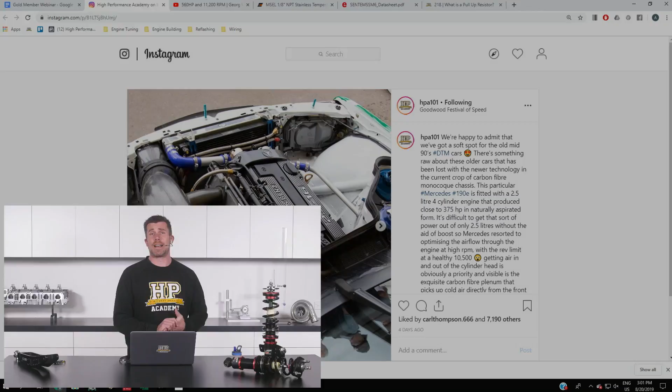So this is a Mercedes 190E DTM race car. This is from back in the early 90s, and I think this is probably a slightly more pure era for race cars in general. We saw the DTM cars. Also, the mid-90s, probably one of my favorite eras for British touring cars, super tourers, etc. Just a lot of really cool race cars were built over that period. Why I like this period is that they were a little bit rawer than what we see now. Not so many driver aids, a bit more driver skill perhaps required. Anyway, that's not really the purpose of the discussion.

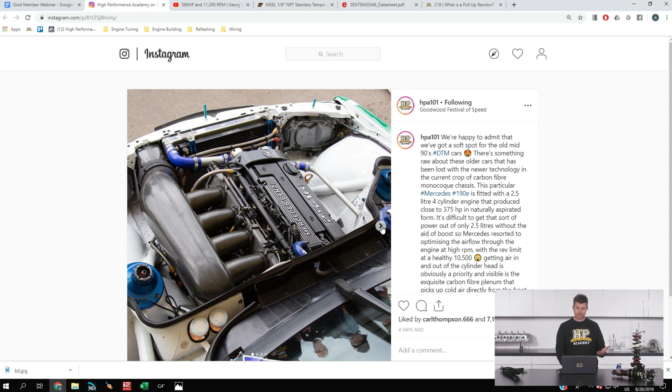What I found interesting was they had a 2.5 litre base engine, and I think at the end of their development they ended up around 375 horsepower. Depending who you talk to, those numbers vary from about 350 to 375. I like to be a little bit generous, so we went with the larger number. It's obviously difficult without a turbo to make those numbers from a four-cylinder engine with just 2.5 litres, and there's a couple of things they did to help. First of all, you can see in this shot that I've drawn all over poorly, instead of individual throttle bodies or a single plenum and throttle, they used a slide throttle arrangement. Now, nothing particularly unusual about that.

There's a variety of techniques for throttling the airflow into the engine. Our conventional throttle body that we see in most factory road cars and race applications is fine, it works well, but even at wide open throttle there is still something stuck in the airflow that can disrupt and reduce the airflow. So the slide throttle body, when completely open, offers absolutely no restriction to airflow. There are a few questions about whether the slide throttle impacts the airflow, causing turbulence, at part throttle, and I don't have any data on that. I could imagine that may be an issue, but these engines are focusing more on outright top-end performance at wide open throttle than drivability.

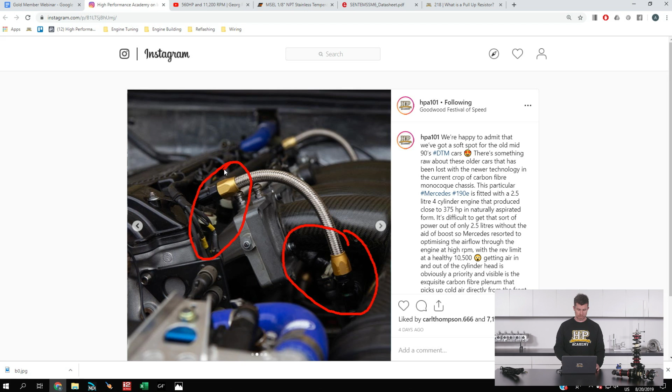Another thing we can see on this shot, it is a little tricky, but if we follow the fuel lines, there are two sets of injectors fitted. We've got a primary set on the left-hand side, right up by the intake port at the head flange, a pretty conventional location for port fuel injectors. And then we've got a secondary set that go into the carbon inlet runners, pre the slide throttle bodies. This isn't done because they couldn't support the fuel requirements with a single set of injectors. Our fuel injector selection has grown dramatically over the last few decades, but we could still get injectors big enough back in this era for 350 plus horsepower.

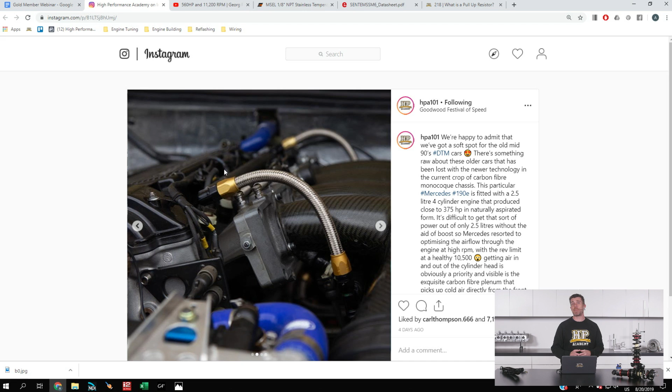However, what they were doing was actually using staged injection here, and the idea is to stage in those secondaries pre-throttle body at wide open throttle and higher RPM, and the aim was to try and get a more homogeneous fuel air mixture, basically trying to get every last scrap of power out of the available air that was entering the cylinders.

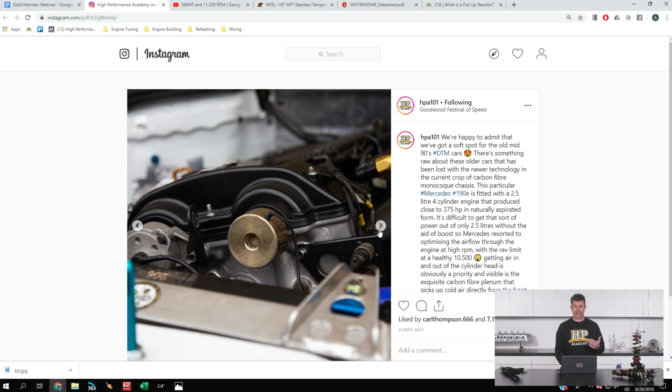And probably my favorite part that came out of this interview or this tech tour was the fact that the engineers actually fitted or retrofitted variable cam control to these engines. So in particular here you can see the little cylinder on the front of the intake cam there. So this wasn't a continuously variable cam control system like we see now. This was a switched cam control system, still popular on a range of different engines. Particular one that jumps to mind is Nissan used it on the SR20 as well as the RB series of engines.

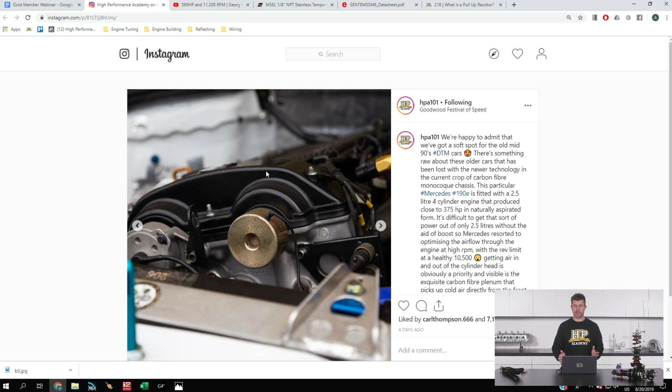So it allows the cam to be advanced at low RPM to help low RPM performance, and then retarded again at a certain point in the rev range in order to optimize high RPM performance. And that was important as well because these engines did rev through to 10,500 RPM. So trying to get as wide a torque curve as possible was pretty important. So there's a little bit of insight into that car. I probably should actually show you a picture of what the car looked like.

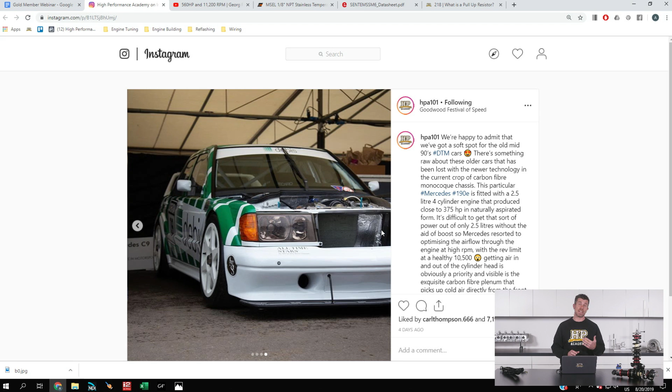Interesting point that came out of talking to the Mercedes engineers there. They actually had just come recently from a Mercedes historic event in which Lewis Hamilton was attending, and Lewis actually got to cut some laps in this 190E. Obviously a little slower and a little less powerful than what Lewis Hamilton's normally used to. Apparently after about 3 or 4 laps they were struggling to get him out of the car, and he was grinning from ear to ear. So just to show you that you don't need all the power in the world, and you don't need to be driving an F1 car to have a lot of fun out on a racetrack.

Right, now we have been talking a little bit recently about our black Toyota 86, the one we've got our 450 horsepower V8 in it, and we've been battling with this car with a few issues around cooling in particular. So we have made some changes, and for those who have been watching us religiously for a fair while, you probably remember a few months ago I talked about the fact that we made some changes to the cooling system in terms of originally there was a large oil cooler fitted directly in front of the radiator. We also had an over the radiator cold air intake designed for a Holden Commodore that was fitted. This came down over the top of the radiator, again blocking some of the flow.

So we made some changes there, moved the oil cooler so it wasn't in front of the radiator, put a conventional air filter on it, so freed everything up there, and we were hoping that this was going to keep our engine cool. In the one race that we did prior to making these changes, we were really battling and having to short shift the engine because after about 5 laps it was getting up to about 110 degrees C, and obviously at that sort of temperature not really going to help with the life expectancy of the engine.

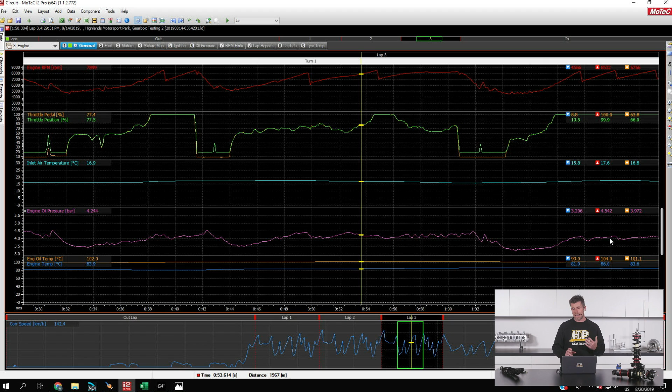But when we're only looking at a snapshot of data like this, it's hard to get a really good idea of what is going on and what may go on if we continue to go and put in another 10 laps after this. So if we just zoom back out, we're having a look at a wider section of the data here. In fact, we've got all of our data here from when the car went out on the track to the point where I got out of the throttle because I was coming back in for a cool down lap.

So if we look at the left hand side at the start of the data here, just after we get out on track, we can see our oil temperature sitting at 69 degrees, our coolant temperature 82. And what we can see with our coolant temperature is essentially it cycles up and down a little bit. We've got a maximum of 89, a minimum of 81, but the important thing is we've got this gentle oscillation depending on whether the car is under sustained wide open throttle operation or whether it's going through a corner at lower RPM or braking. So that's good. This is what we want to see. We've got this gentle oscillation and we're never really seeing a continual trend with our temperature climbing.

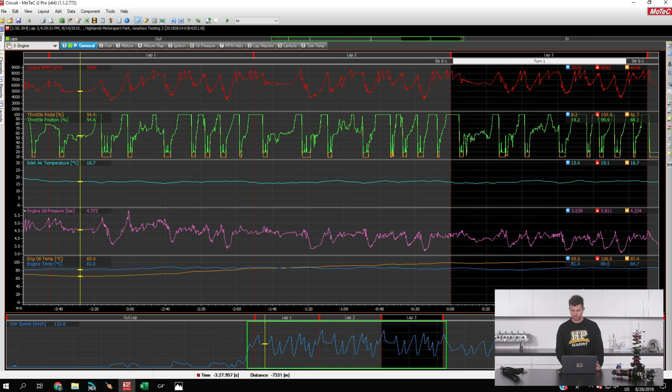Unfortunately, the same can't be said for our oil temperature here. When we initially get out on the track, we see the oil temperature drop a little down to 65 degrees C as we start getting airflow over the cooler. However, from this point on, it's a constant rise. And basically at the point where we get out of the throttle on our cool down lap, we're up to 105 degrees. So it doesn't take a rocket scientist to extrapolate that trend that we've got going on there, and we've got this constant movement of our oil temperature up and to the right.

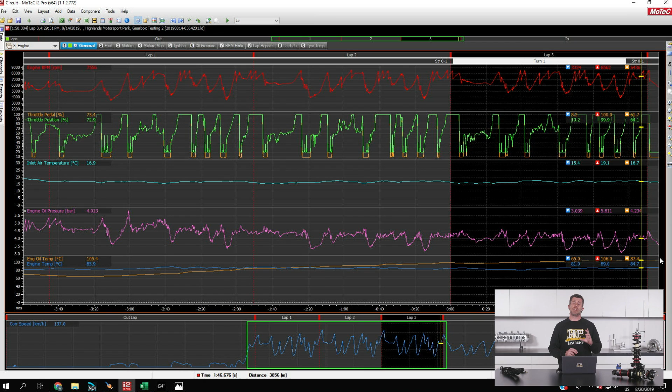So what this indicates to us is probably we're going to have issues for endurance racing and we are going to be fitting a larger oil cooler. It's not all bad though. Getting control of our engine coolant temperature is a massive win, so we're pretty happy with that.

Now at the same time, if we head across to have a look at some of our other data here. If we go to our transmission general, we've got our temperature for our gearbox, that's in the center here in purple, and we've got our temperature for our differential in green at the bottom. Now this is definitely not good news. We can see we've got that really sharp increase at the start of the session. Transmission temperature 79, diff temperature 79 basically, and by the end of that session here we have peaked 105 in the gearbox, 123 in the diff.

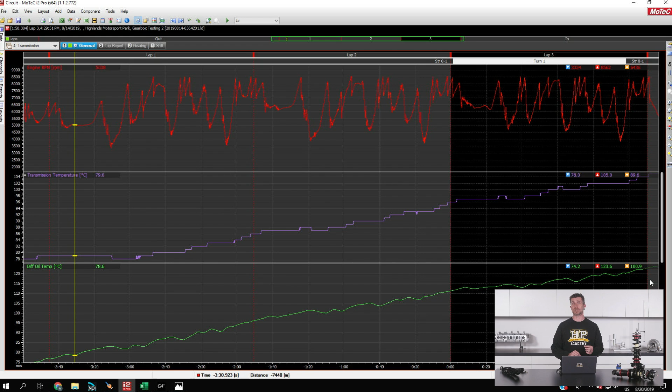Now, the gearbox manufacturer has recommended the grade of oil that we're running in this transmission and also suggested we don't go over 110. Obviously, for reliability purposes, we're going to take their advice. So we are in the process of fitting oil coolers to both the diff and the gearbox. So I'll just take you through and show you what that all looks like. Bear with me for a second here.

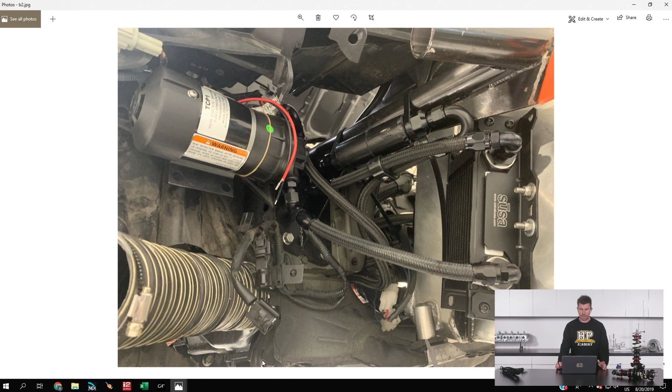Right, so on my laptop screen at the moment, this is the front right-hand corner of the car. It's a little bit hard to really make out what we've got going on here. This is actually the brake cooling duct that normally connects up to the front bar. So what we've got is a Mocal gearbox oil pump here that's been fitted up in the chassis.

And it's a little bit tricky here trying to choose a location for one of these oil pumps because obviously we've got a chassis that is pretty tight for room. We also don't want to put this in a place where it's overly exposed to being damaged in a crash. So Brandon spent a fair bit of time looking at our options. We basically came to the conclusion that if we end up in a crash that's bad enough to damage the gearbox oil pump mounted here, we're probably not going to be continuing anyway, so gearbox oil temperature is the least of our issues.

So Brandon has also mounted a little filter element in here. So this is quite a coarse filter element. The aim is really if we have a gearbox failure and we get a dog tooth or something snap off, we want to prevent that going through the pump and damaging the pump. So it's not really there so much for fine debris. Then we have the cooler core itself. So that's just mounted to the side of the radiator, so it's going to get airflow straight from that front bumper.

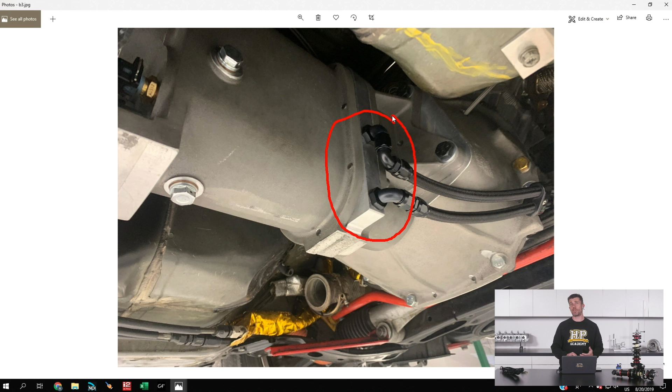Looking at the side of our TTi 6-speed gearbox, the gearbox is made with cooling in mind, given that these are used quite commonly here in New Zealand in endurance racing. So the centre CNC machined alloy plate there has a fitting for both the oil drain as well as the oil return. So those are just hooked up to our pump there.

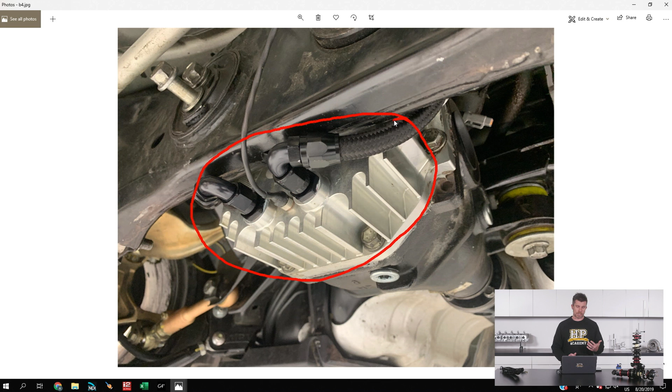At the rear of the car, this is the Cusco diff cover that we talked about a while back, and Brandon has just fitted -6 AN fittings there and run the plumbing to the rear of the car. And again, we're trying to choose a location where this little cooler core is not going to be exposed to unnecessary damage. And again, while it's a little bit hard to see, this is the main chassis rail here, so that actually extends back behind the oil cooler. So again, it's going to be a pretty serious shunt if we're in a situation where that oil cooler is damaged. And while you can't see it in these photos I've got here, the pump has been mounted up inside the rear of the car.

So the aim with this is that both of those pumps will be controlled with an output from our MoTeC C125 dash. If we had fitted a power distribution module, we would actually do it direct from the power distribution module, and this means that we can have them turned off when the oil temperature is low. Once it gets up to maybe 90 or 100 degrees, then we can switch those oil coolers on, and if we've got excess cooling capacity with those, then the pumps will cycle on and off.

We will be going to a power distribution module in this car for these functions in the not too distant future. That way the dash can still control the operation of them using a CAN message sent straight out to the power distribution module. Simplifies the wiring because we don't need to wire an auxiliary output from the dash up to the power distribution module in order to switch them. But another nice feature with the power distribution module, and I quite often get asked, why should you spend the money on a power distribution module? Where are the advantages? Because they are still more expensive than relays and fuses, but the ability to data log a lot of information from them can be just one of their advantages.

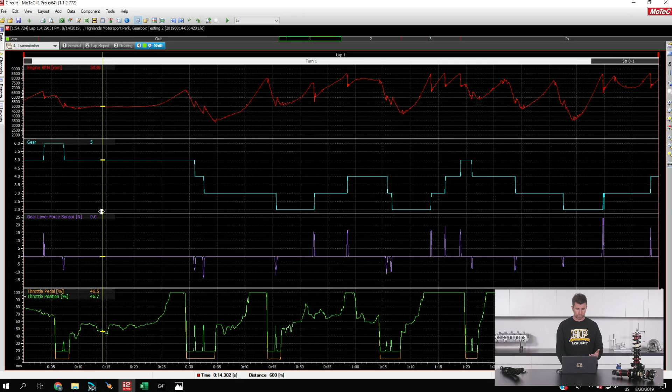We've got our RPM at the top here. We've got the gear, that's the next channel below, and this is the one that we're sort of interested in here, which is our gear lever force. So this is the output from the strain gauge gear lever that's converted into newtons of force. So we can see, for example, the little spike here, this is the driver pulling back on the gear lever

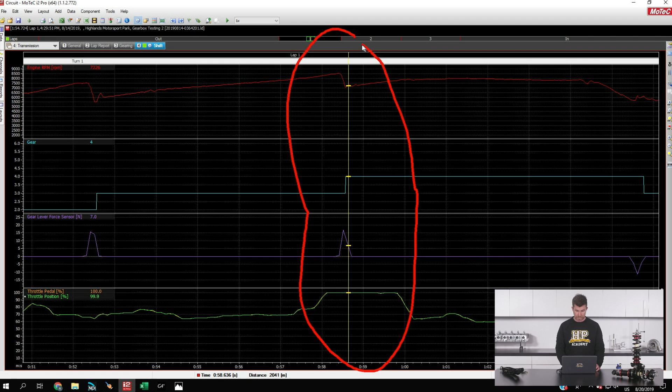for an upshift. So the driver can stay at wide open throttle, in particular here, if I just zoom in a little bit, so you can see this area here highlighted. In the bottom we've got our throttle position. This was a full throttle shift from third into fourth gear. So the ECU takes that signal in, performs an ignition cut which allows the dogs to disengage, and then the next gear can be selected.

Now the interesting thing, or what I wanted to show you though, is the downshift. So here we've got a section where we are downshifting, so you can see that the voltage or the Newton force into the strain gauge goes the opposite way as you'd expect. So the ECU in this case is going from fourth down to third gear, and we can see that we've got our two traces at the bottom here.

The orange trace is the driver's throttle pedal, so we can see that the whole way through this downshift area the throttle pedal is completely off the floor, that's at 0%, and when the ECU detects that downshift request, what it does is it automatically blips the throttle at the actual engine. So that's what you can see there, the discrepancy between the driver's foot pedal position and these two blips that are being performed on the downshift.

So the idea there is to match the revs for the next lowest gear, and if you get everything right, it is a really smooth, seamless shift. Now the MoTeC M1 also makes this a little bit easier because it knows what the RPM will be for the next gear, knows what the gear ratios are, so it's pretty easy to calculate for a given engine RPM, if we downshift into a lower gear ratio, what the RPM for the engine should be.

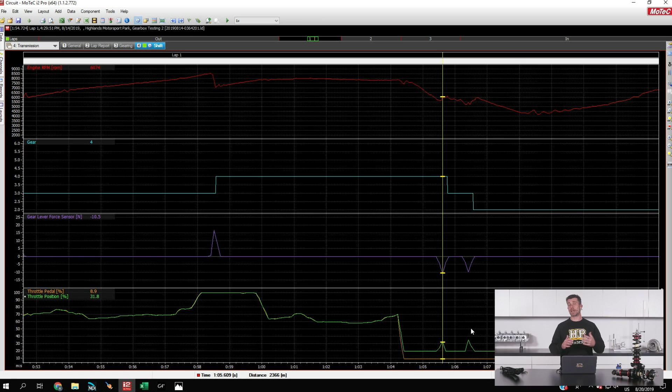So what it can do is it instigates a downshift engine RPM limit. So if you're a little bit over enthusiastic with the blip, it will actually hit that limit. It's not something we want to be doing because when it hits that limit, it will bring in an RPM limit cut. So you actually end up with quite a sharp crack sound, which is a little bit off-putting on the downshift. So that's just part and parcel of tuning that closed loop gear shift control.

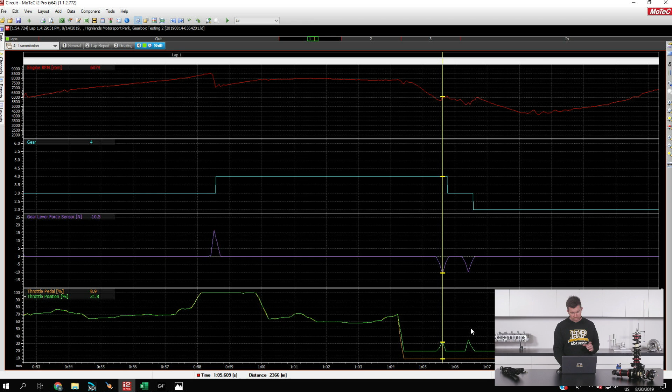Now, while we were playing around at the track, we actually narrowly escaped a pretty serious problem. So again, we'll jump over to my laptop screen. Brandon noticed this as soon as we got the car back up on the lift once we came back from the track. And as you can see, the rear CV here, the cap screws that hold the two-piece CV together, have all backed out.

Now, I actually put these together myself, so I know full well that these were tight, and this seems to be a potential issue with a few cars that run at our local track, Highlands Motorsport Park.

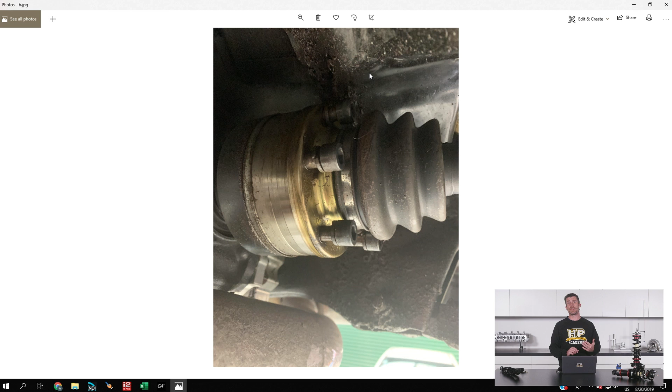Another team that we deal with had exactly the same thing happen with their Volkswagen Golf TCR race car, and while we're only kind of guessing here, it seems like it could be down to where the cars with a reasonable amount of power go over the bridge overpass at Highlands Motorsport Park. They will actually get light. They basically can end up off the ground if you're going just the right speed, and this can allow obviously the rear wheels to unload, so you end up sort of touching the rev limiter and they grab back down.

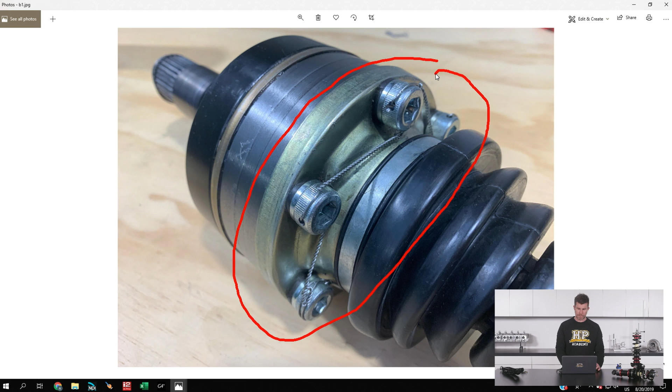Anyway, we know they were tight, so we're not really going to trust that Loctite's going to fix that. So the solution here, which is what Brandon's been working on this morning, is a new set of bolts here, and this time they have been lock wired or safety wired, so this means there is absolutely no chance of those cap screws working loose. So this is the fun, I guess, when it comes to modifying cars, is you fix one problem and you find another. So your job is really never done, and there's always little areas that you find that do need work and do need some improvement.

We've got our first course just about complete now, which is a DIY wheel alignment course, so you'll learn how wheel alignment works and how to actually check and make your own wheel alignment adjustments. And we're just in the process of filming a worked example, which will be the case of fitting these components we've got here into our RaceCraft Toyota 86. So I just want to mention what we've got here.

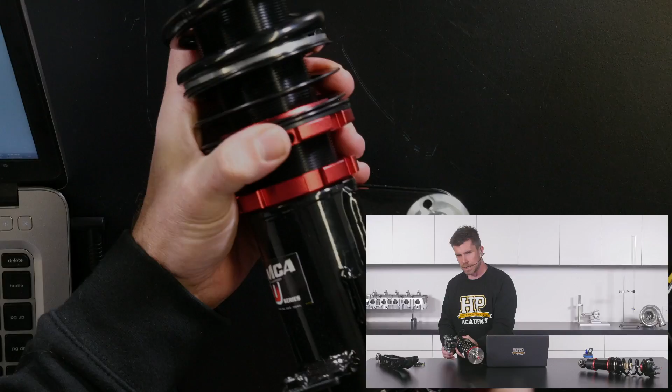Another aspect with the coilovers from MCA, I'll just try and show these under the overhead camera. I'll just drop into that. So we've got the camber adjustable strut tops, but they also removed the factory or the common eccentric style camber adjuster, which are so easy to end up having move. And instead, MCA used these offset washers, and the center of these washers is offset to allow you to get your camber wherever you want it. As you can see though, they are then bolted to the strut body, so there's absolutely no chance of those moving once you've got your camber where you want it to be.

So along the lines of trying to get a little bit more adjustability into the chassis, we are also fitting some parts from SPL Parts in the US. So in particular here, we've got one of their rear lower control arms. So this is adjustable, so we basically make this lower control arm shorter or longer, which influences the track width, but also the camber at the rear of the car. And these use a spherical bearing instead of the factory rubber bush. And the reason that that's important is that factory rubber bushes or aftermarket urethane bushes, they will tend to flex under the high loads we see on a racetrack.

And what this means is that the alignment, the toe settings and the camber settings that we get when we're setting our car up, they're not going to necessarily be exactly what we end up with on the track when we're hard under braking or cornering really hard. So spherical bearings on the upside will not move around. On the downside, they will transfer a lot more noise, vibration and harshness into the chassis. So not necessarily ideal for a street car, but for a no holds barred race car where performance comes first, these are the way to go.

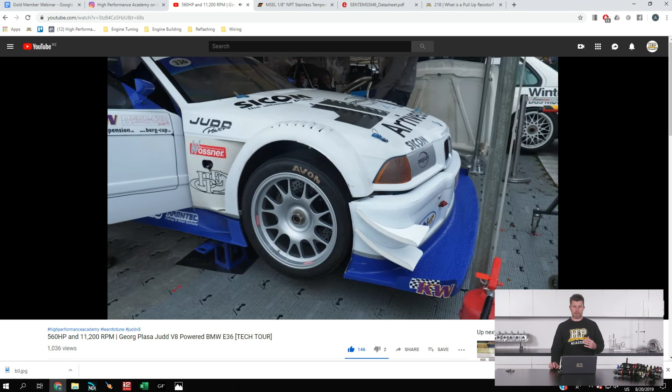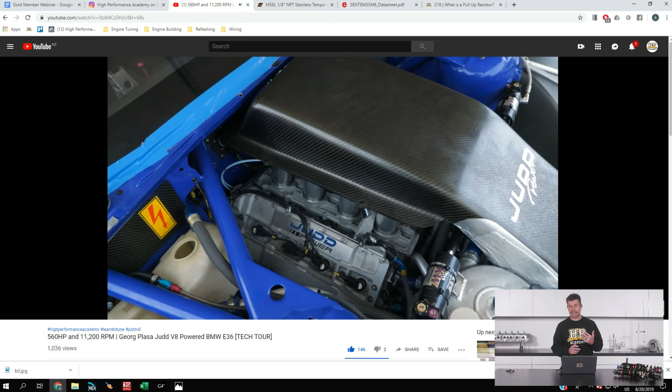And this is a car that I'm sure a few of you will have probably already watched, or probably more specifically listened to. There's heaps of YouTube clips of this car competing in the European Hill Climb Championship. It is, of course, Georg Plasa's old BMW E36. Nothing particularly special about the chassis. It's really the engine that is the exciting part of this car. So it's powered by a Judd 560 horsepower V8 that revs to 11,000 RPM, running through a sequential gearbox. And this thing sounds really just like an F1 car. It is one of the most amazing sounding hill climb cars. I love turbocharged engines, but it is hard to go past a high revving V8 or V10 for that matter. Really, there isn't too much that sounds quite as good.